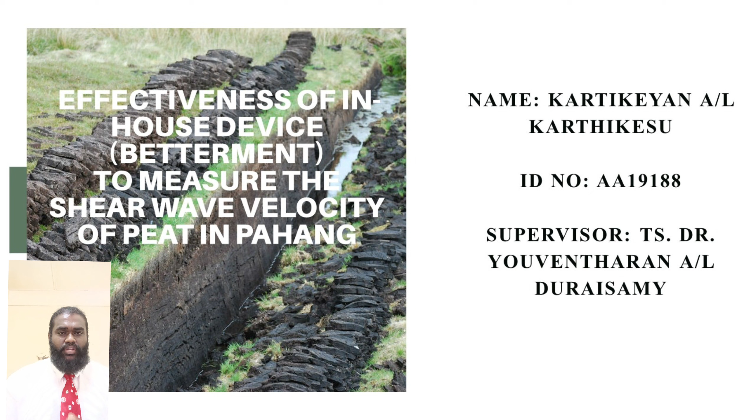Understanding the behavior of peat and finding solutions for its utilization are crucial for preserving this valuable ecosystem and ensuring environmental sustainability. The aim of this project is to utilize our in-house device, called Betterment, to measure the shear wave velocity of peat.

Our first objective is to thoroughly examine and understand the properties and characteristics of peat. Peat, being a unique organic soil layer, presents distinct traits and requires in-depth analysis to grasp its behavior and composition. The second objective is to utilize our innovative in-house device, Betterment, to measure the shear wave velocity of peat soil. Shear wave velocity is a crucial parameter in determining the stiffness and the strength of the soil, enabling us to assess its suitability for construction purposes.

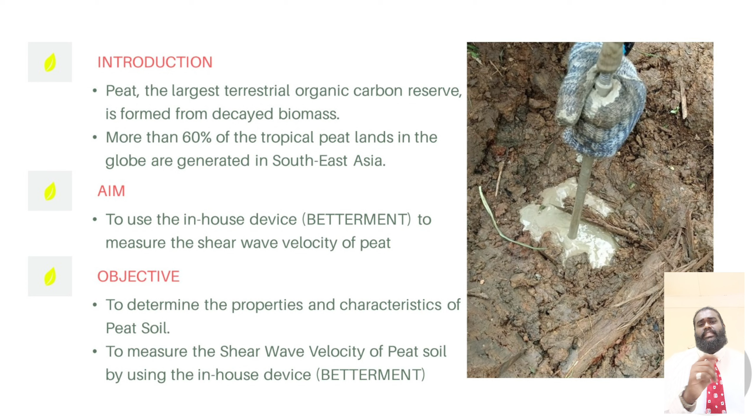By achieving these objectives, we aim to contribute to the scientific knowledge and understanding of peat soil. Furthermore, the data obtained from our measurements will provide valuable insights for sustainable land use planning and engineering practices in areas with peat deposits. The evaluation of shear wave velocity (Vs) in peat soil poses a significant challenge due to the limitations of traditional laboratory testing methods.

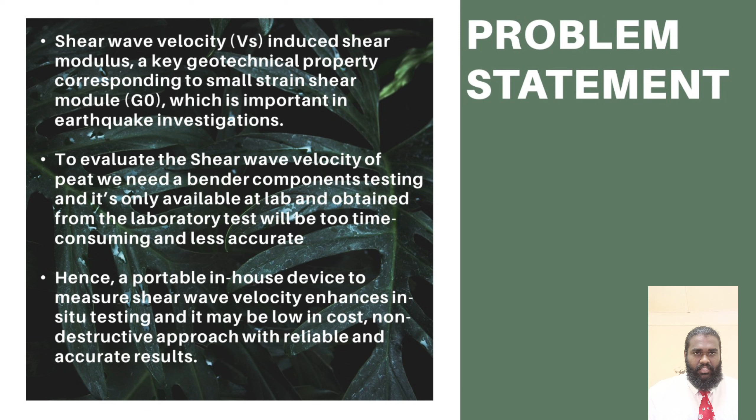To address this problem, our objective is to develop a portable in-house device that accurately measures shear wave velocity in peat soil. This device would enable in situ testing, offering a cost-effective and efficient solution compared to laboratory procedures. By providing reliable and accurate results, our aim is to enhance our understanding of the geotechnical properties of peat soil and improve site investigations. Ultimately, this innovative solution will save time and resources while delivering valuable data for more effective engineering practices.

Now let's talk about the scope and limitation of our project. This study focuses on evaluating the shear wave velocity of peat soil in the East Coast region of Malaysia, specifically in Pekan, Maran and Gebeng, Pahang. The goal is to compare the readings obtained from the in-house device Betterment with established parameters, despite potential slight differences from the laboratory testing. The shear wave velocity will be determined using the formula Vs equals the square root of G over rho, where G represents the shear modulus and rho represents the density of the medium.

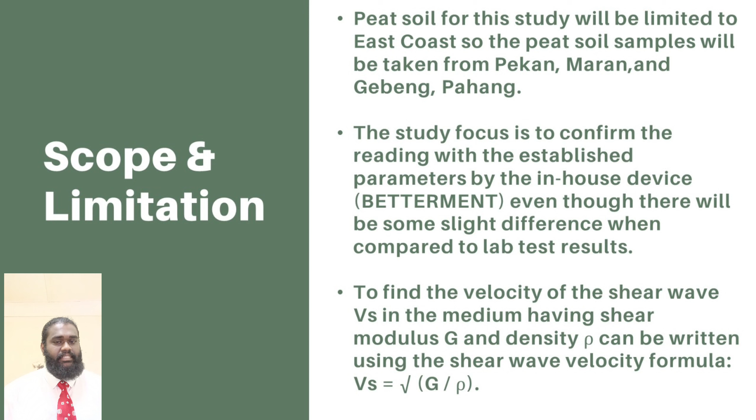It is important to recognize that the study scope is limited to the specific region and soil type, and the findings may not be applicable to other areas. The limitations of the in-house device and variations in peat soil properties should be considered when interpreting the results.

According to the research methodology, we collected samples from 3 different places, which are Pekan, Maran and Gebeng in Pahang, as I stated before. All the lab tests were carried out in the Soil Mechanics and Geotechnics Lab, located at UMP Gambang, Pahang. I carried out several experiments, which are the Von Post scale, Mackintosh probe, pH test, moisture content test, fiber content, direct shear box test, specific gravity, Atterberg limit, bulk density and hydrometer test.

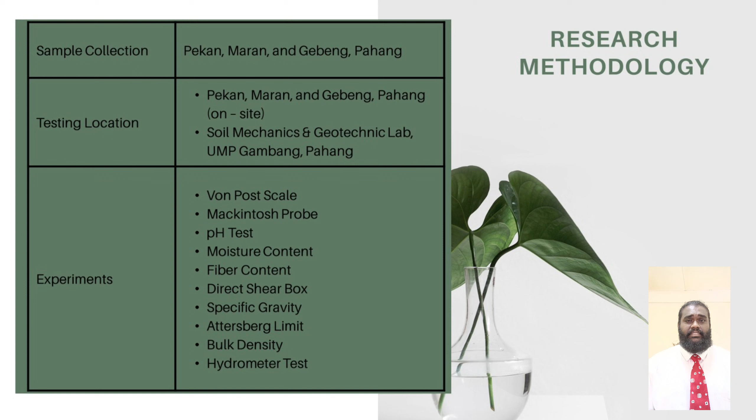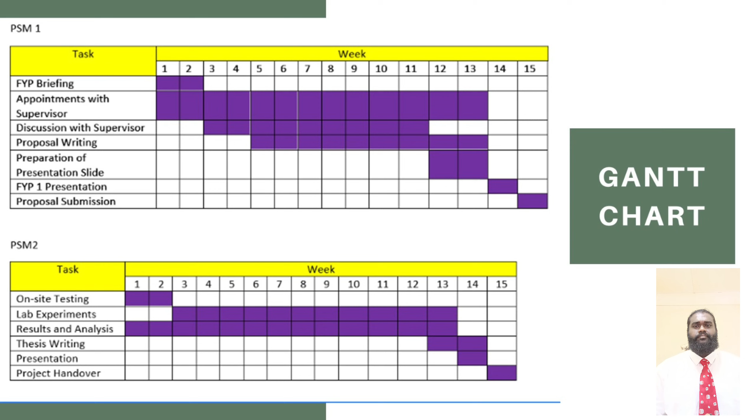Now let's move on to the results and discussion of this project. This is the first graph, where I plotted the shear wave velocity taken from the Betterment, the in-house device, against the frequency. The frequency was changed to get the optimum shear wave velocity of the soil, because when the peat soil has a low shear wave velocity, we tend to set the frequency from higher to lower in order to get an optimum shear wave velocity for the peat soil. So this graph contains the shear wave velocity of Pekan, Maran and Gebeng soil.

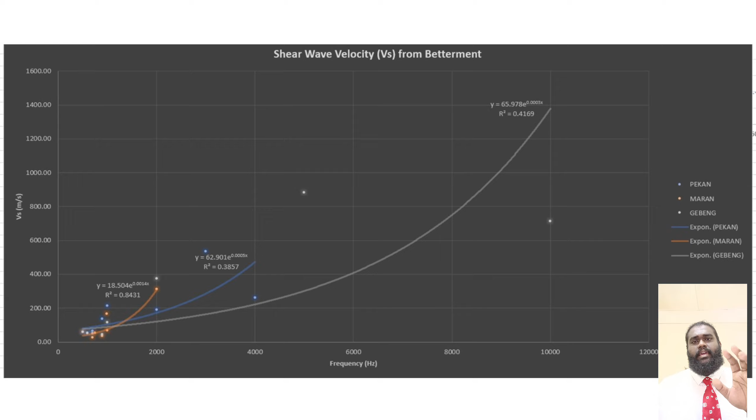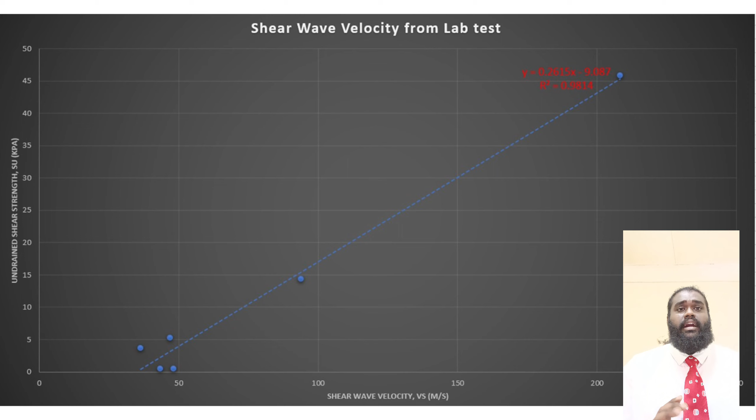Next, this graph was plotted from the values obtained from the lab tests which I carried out earlier. This graph plots shear strength, Su, taken from the direct shear box test, against the shear wave velocity.

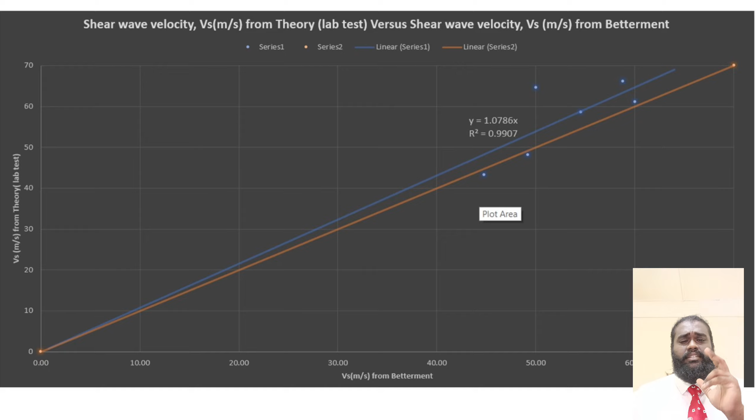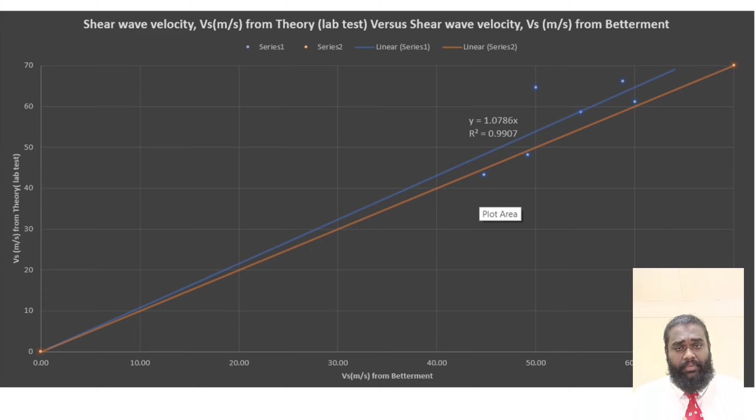Hence, we can clearly say that the shear wave velocity from the Betterment, the in-house device, is close to and reliable when we compare it with the lab tests which calculated the shear wave velocity.

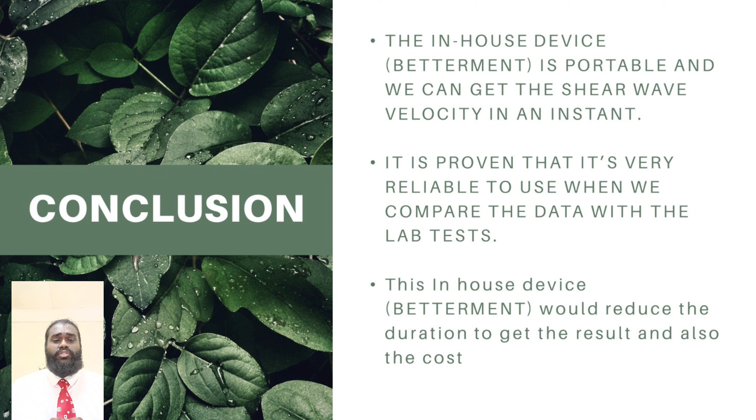In conclusion, the in-house device Betterment is portable and we can get the shear wave velocity instantly. It is proven that it's very reliable to use, because when we compare the value from the Betterment with the shear wave velocities taken from the lab test, they are most likely the same. So this in-house device Betterment can also reduce the duration to get the result and also the cost. I hope that I clearly concluded the objective of my final year project.